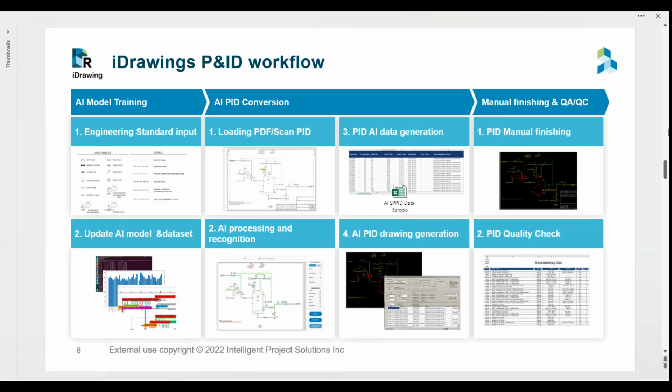To show the step-by-step process via live demo, Mr. Dennis will be conducting the demonstration. But before we proceed with the demo, let's kick things off with our first poll question.

Our first poll question is: why do you need to recreate P&IDs for your company? Please take a moment to cast your vote. Is it because of digital transformation, new capital project, or operation management?

Thank you very much for your response. Everyone in this webinar is recreating P&IDs for digital transformation, almost - we received 88% of the vote.

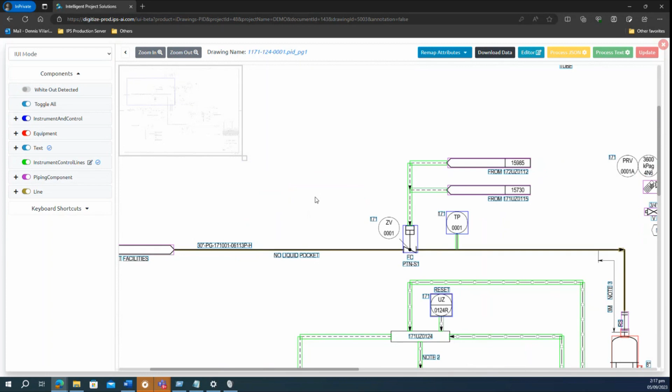And this box represents the symbol detection. So if you can see, the color also matches these components here. For this instrument, you will see that the bounding box is green. And for OPC, it is matched for piping component, which OPC is supported on this category as well.

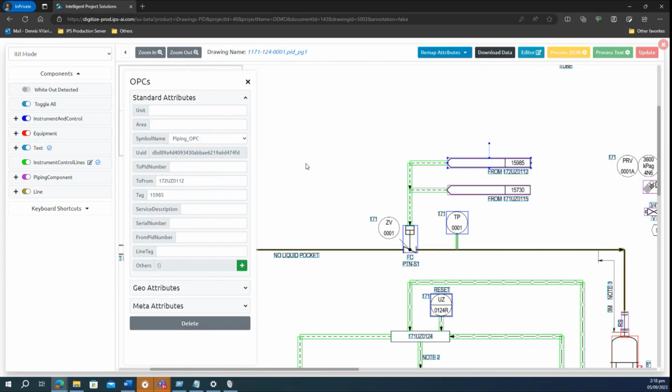So one of the features of this IUI is the editor. The editor will allow us to review the detection location for each component, along with all associated link attributes for those components.

So for example, for this safety device, we can see now the actual symbol detection. And if you click this one, it will directly go to the bounding box symbol. On this screen, this will automatically prompt up this property box.

You can do any correction or modifications in this screen if there will be false detection from AI. For example, for this suffix, if I change this to B, it will automatically change also in the backend. As well, in the editor, we can also modify directly here.

So we can turn off this thumbnail to show the list format. You can also update the IUI here, or the data. So this is basically the use of the IUI.

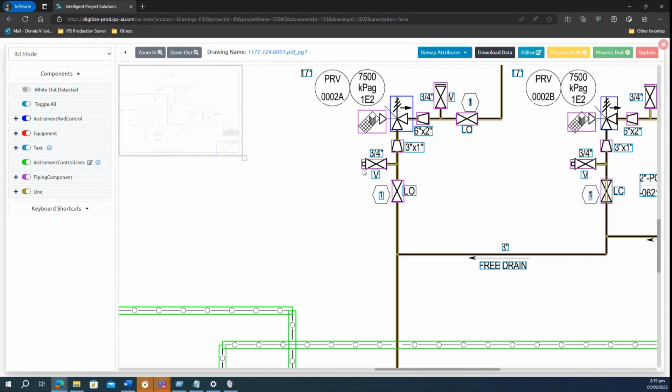So on the next process will be the deliverables. So if we complete all the corrections and modifications of the data through IUI, we can update this drawing and close.

So once we are already done, we will go to the deliverables. So deliverables, if you can see, it's processing. Basically, the algorithm is already working or processing for those piping networks and other connectivity for lines and components.

If you can see, this is now the deliverable screen, where we can review all the relevant attributes for each component. This report template follows IPS standard, but we can customize it based on the client's requirements.

You can see we have the line list, instrument list, control valves. For control valves, we already see here a few data coming for prefix, sequence numbers, parent tag, and for line list, we can also show the to and from information.

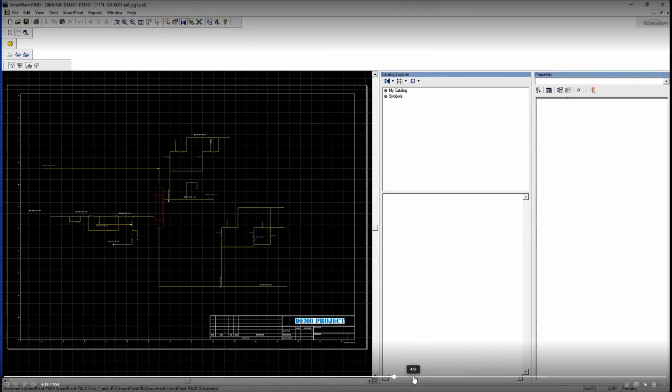If you can see here, all the components will be generated automatically, including the line tags or other attributes or labels. So forward this one.

Once the SPPID converter is completed, it will automatically close the program or application, and we need to reopen that one for the validation.

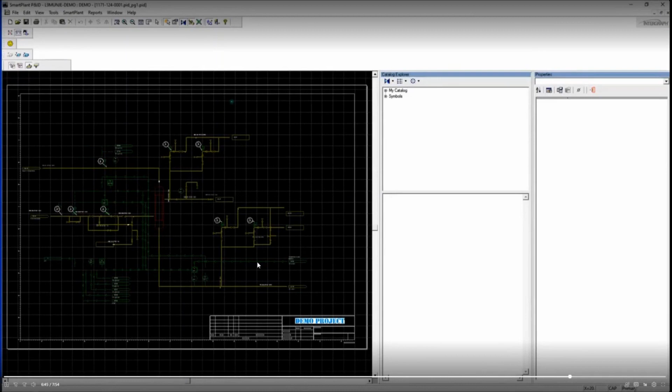As we all know, AI data provides only 70 to 80% detection, and it will enhance based on the data set that we have. It will go to 90%, but using IUI mode or interface, it will correct the data to 100%.

There will still be some gaps or exceptions in this SPPID. One of the exceptions is connectivity. We have to enable this connectivity for us to retain the correctness of the property.

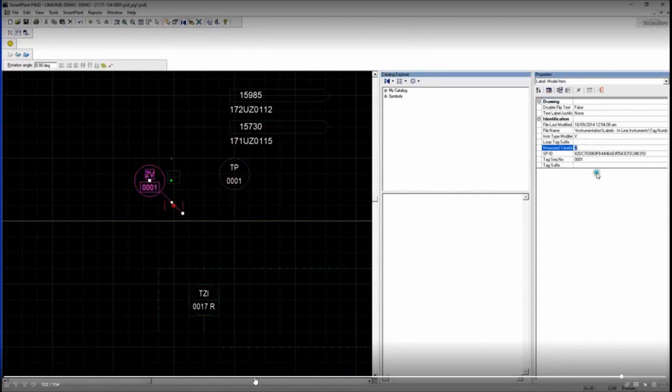As an example here on this screen, you can see that data is already coming in the line for these properties, as well as for the instruments. Data is coming for these instruments and for control valves as well.

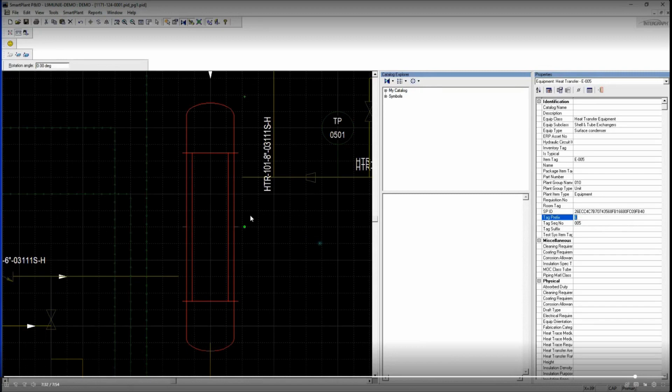Basically, there will still be human intervention for these generated drawings, so the drafter will still do manual touch-up. But as mentioned previously by Miss Alili, this will help reduce man hours correcting this generated output compared to redrafting these drawings from scratch. So any question?

Thank you so much, yeah, Sir Dennis. Thank you. Thank you.

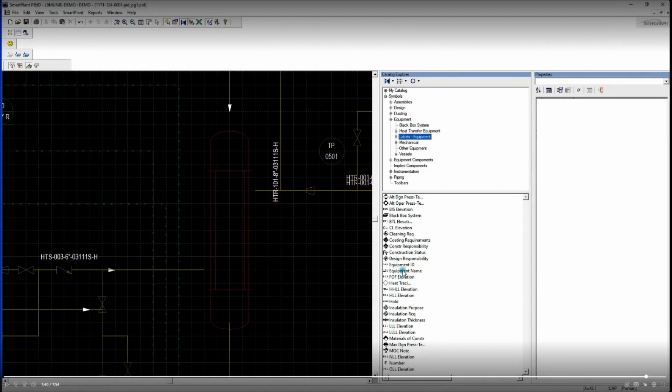Our price model is per page, and you don't have to spend any licensing for this. Basically, it really depends on how many pages you are looking at, we price them differently, and with a larger quantity you get the benefit of the lower cost.

IPS continues to offer AI-based solutions where we configure the model, run the drawing, generate the data, and help train you on how to load the data into the system and finish the last mile of cleaning. Or we also provide service directly as fully 100% generated, either by our own office, and we also work with quite a few partners globally.

It offers standardized and searchable drawings, which can be integrated into major engineering and asset management software such as SmartPlant, AutoCAD Plant 3D, and Aveva.

With iDrawings P&ID, you can save up to 30 to 60% of the cost and complete the conversion process 2 to 3 times faster.